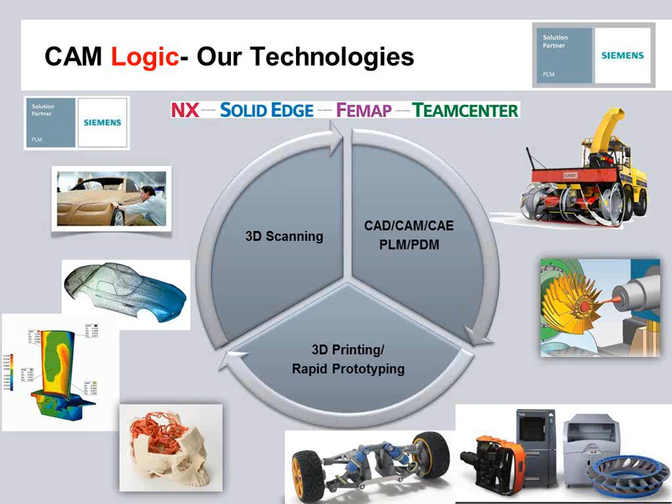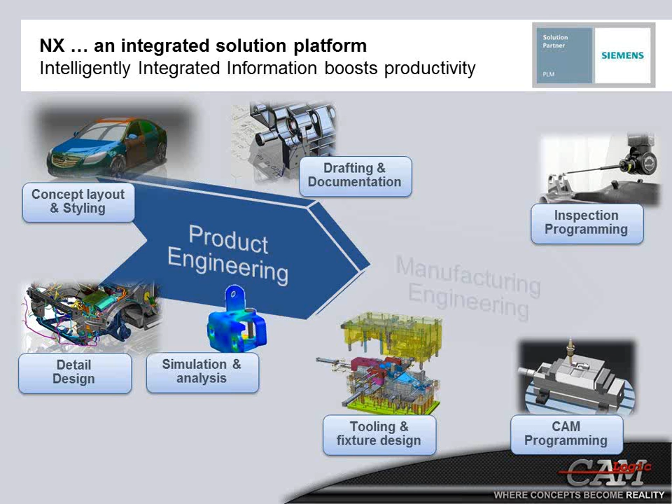Within the NX team, we've looked into challenges that you, our customer, have communicated with us that you are facing. And it's clear that these challenges have subtle differences, whether you are in the product engineering team or the manufacturing engineering team. What we'd like to do today in this presentation is split those challenges into segments. Let's look at the manufacturing engineering area after we first look at how those challenges have affected the product engineering area.

In today's presentation, I will be discussing NX 8.5 enhancements in three separate areas. We will first look at the CAD side, or product design. Second, we will look at CAE, or simulation. And then we will look at the enhancements in CAM, the manufacturing side.

So let's start out with product design. There are many enhancements in NX 8.5 CAD, and we will review each of these areas.

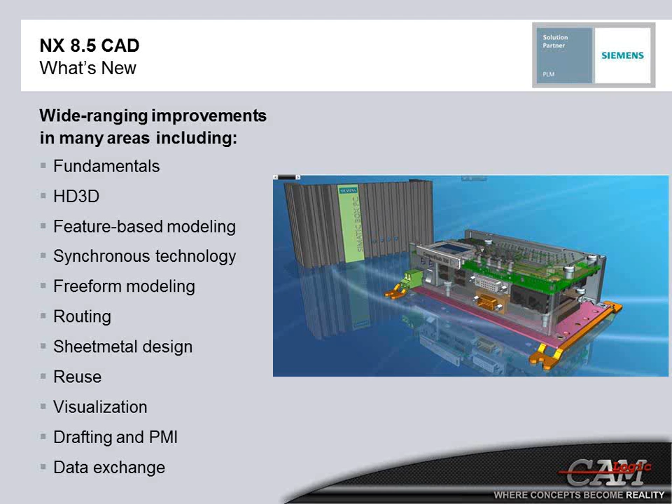Let's begin with the multiple enhancements in fundamentals and sketching. This list is a bit long, but stick with me. You now have the option of longer object names in NX 8.5, meaning you no longer have to abbreviate, and your models can be easier to understand and navigate. The new options for the display of smooth edges makes it easier to understand your model, especially when placing blends on complex parts.

It is now possible to customize the radial pop-up menus, which, by the way, this was the #1 enhancement request from the customer base. In NX 8.5, the user interface provides you with as many or few options as you need with the new Less and More dialog box versions, which are based on the role you are using. If you need fewer options, you get the simplicity of a Less dialog. And if you need the versatility and options of the full dialog, you get the More option.

Model rotation is easier to use and more intuitive thanks to enhancements such as setting the center of rotation to the center of the view or to an entity that you select. The new Align Facets Along Edges option improves the quality of rendering by generating facets along common edges selected by the user. See-through preview highlights the feature being created or modified by de-emphasizing other geometry in several customizable ways, such as making them more translucent, changing their color, or applying edge effects to them.

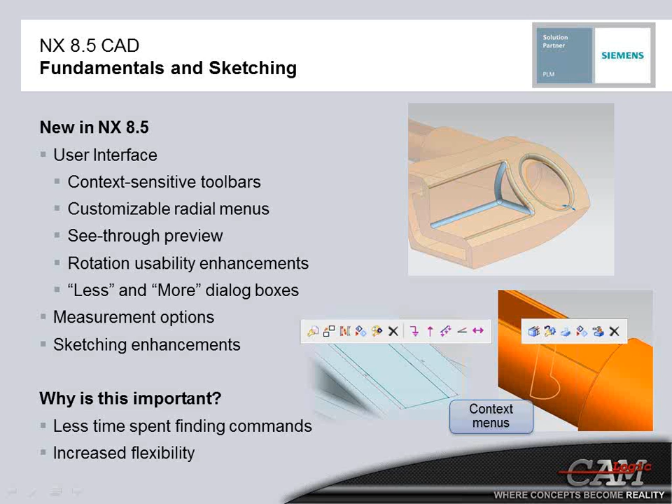The new Customer Default Create Dimensions for Typed Values enables you to create driving dimensions by entering specific values for the size of your geometry. And finally, for this slide, the new From Center option lets you infer constraints from the midpoints to the center of rectangles, giving you increased flexibility.

Improvements in feature-based modeling will allow you to automatically close the profile to surrounding model geometry. This tool is a smart volume based on closure with the target solid. The value is the ability to simplify the process of defining profiles, and it simplifies the process of creating ribs by automatically extending the profile.

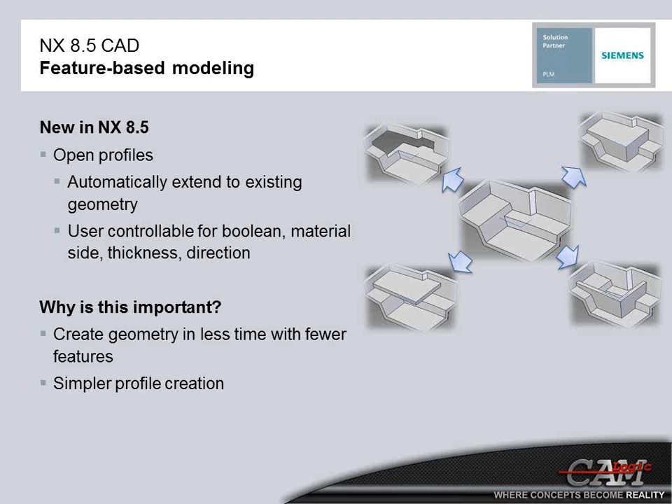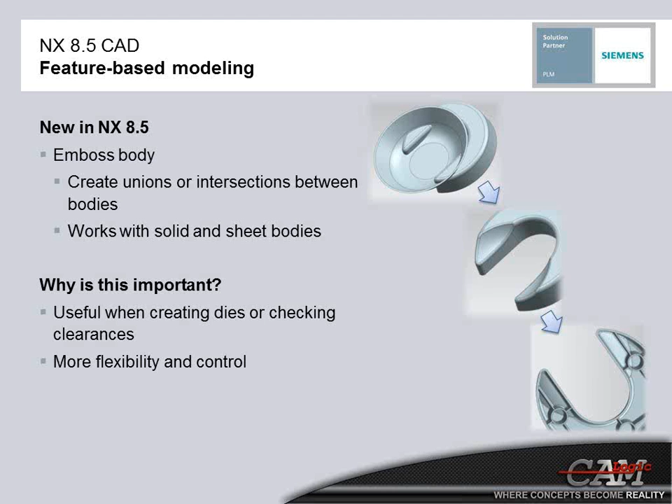Emboss Body is a new command that allows you to create intersections or unions between two solids or sheet bodies. This is useful for creating dies or ensuring sufficient clearance between two parts.

Users can now perform a Boolean unite while optionally removing excessive or unneeded portions of the model. Without this feature, the user would have to perform one or more additional modeling operations to get the same result. When you unite solid bodies with overlapping or excess material, you can select which faces should be kept or removed. This allows you to create your desired geometry with about a third less commands and 25% fewer features.

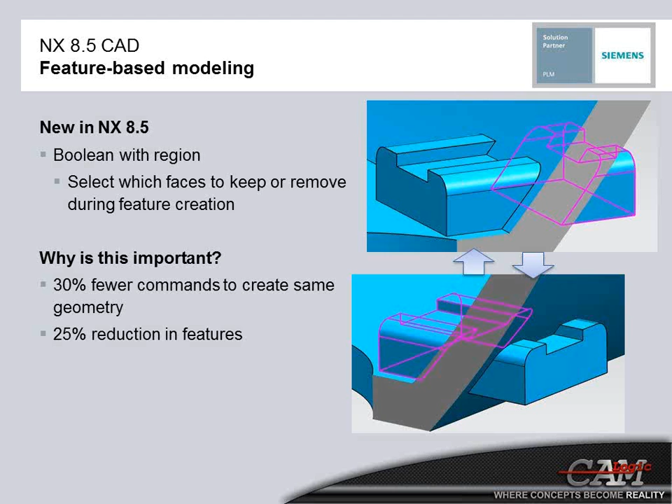You can now add draft to a model using an intersecting surface, including non-planar surfaces, as the parting line. This draft can be one or two-sided. While this has been possible in the past, with the new functionality, it is significantly faster and more efficient, with 40% fewer features and only a third as many commands as the old method.

Users can now add draft to a model where the parting line is defined by an intersecting surface. Prior to NX8.5, a user would have to create additional geometry before he could add draft to the model, which would have to be selected for each draft face created, which in turn, of course, increases as the model became more complex. And if both an upper and a lower draft feature was desired, it would require creating a second feature using the same workflow as the first one.

However, with NX8.5, the user can now reference the surface directly to define the parting line, irrespective of the number of faces, in a single pick. And he has the option of creating both the upper and lower draft faces as a single feature.

New selection rules make it easier to select the geometry you need when creating draft features and edge blends.

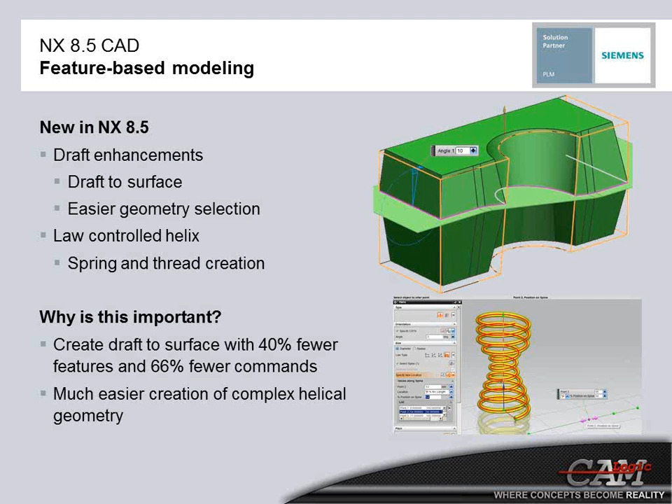Synchronous technology within NX8.5 can now alert you when the changes you are attempting will cause potential errors so that you can adapt accordingly. In synchronous modeling, there is now improved recognition of problem area conditions that are likely to result in potential errors when moving or deleting faces. The alert messages now provide improved clues to identify the error condition and offer potential solutions.

For example, the faces on the center boss feature are to be deleted using the delete face command. An alert message informs you that the remaining faces cannot adapt to close the area left by deleting the selected faces. Some possible solutions are given, such as using the cap option or deleting the blends first.

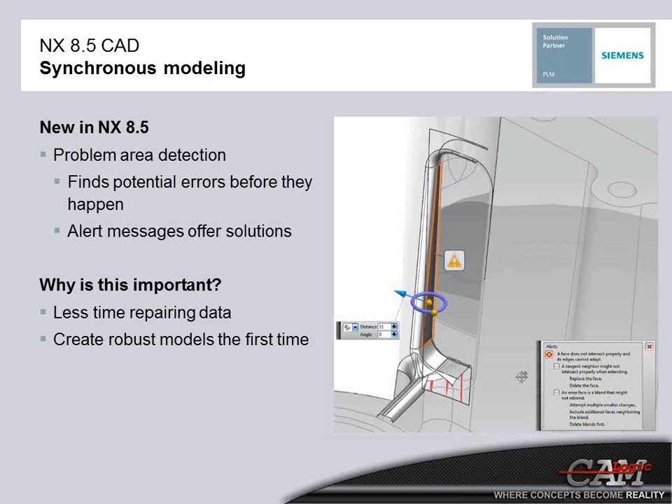New options in the delete face command allow you to easily select blend surfaces for deletion. You also have more options under the heal setting to get the geometry you want after deleting a face.

You can now use the delete face command to delete a portion of a blend and cap the end of the blend where it neighbors another blend. When you use the new delete partial blend option, all faces selected must be blends.

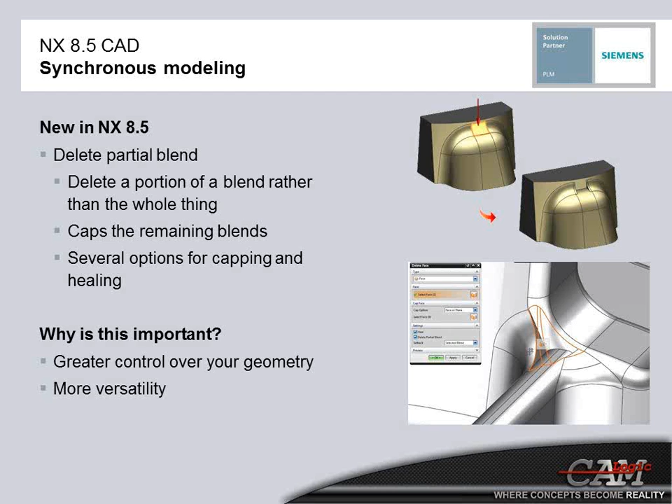Label Notch Blend is a new feature in synchronous modeling. This new feature allows you to label faces as blends, adding intelligence to history-free data and making it easier to get the results you want when you use synchronous technology to modify the geometry.

The new Step Face and Move Behavior option gives you greater control of your geometry as you use Move Face to modify it, meaning you are more likely to get the results you want the first time.

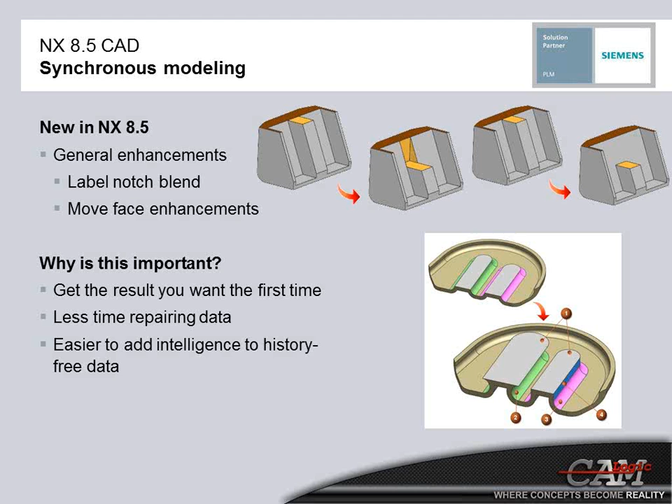Freeform modeling has been enhanced. You can enhance the visual display of your curve geometry by highlighting endpoints in several different ways. New surface analysis tools such as isoclines and reflection contours help you ensure that your surfaces meet all necessary requirements.

Fit Surface allows you to fit a surface to existing geometry such as facet bodies or points, which is useful for reverse engineering. These surfaces can be freeform, planar, spherical, cylindrical, or conical, and they are completely editable.

The local radius analysis command creates an associative analysis object that gives you information about points, edges, or faces and their location, UV parameters, and radius of curvature.

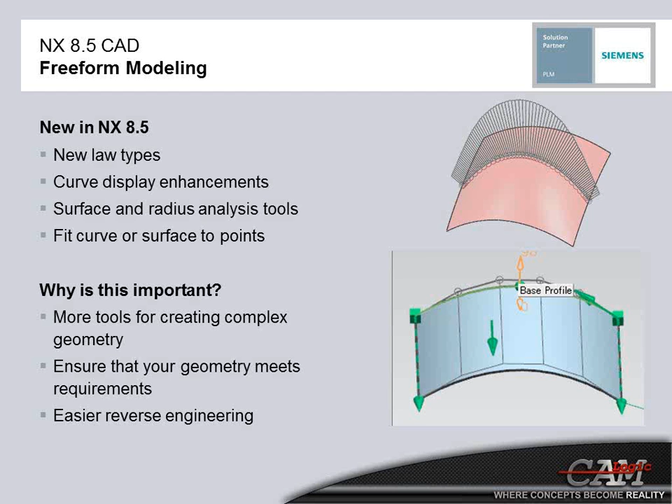For routing, the new Mirror Assemblies command in NX Routing allows you to mirror routing objects to create symmetric routing networks, thus saving time and ensuring consistency.

The Run Navigator command is now more powerful and versatile, thanks to the ability to create runs, search runs by attributes, assign paths, activate and deactivate runs, and control the flow direction.

The Unify Path command can now identify parts by their specifications, making it easier to find and replace components with the same specifications. This saves time and ensures that the requirements are met.

The new Handrail Creator command allows you to easily build handrails for platforms using a few simple parameters and the reuse library.

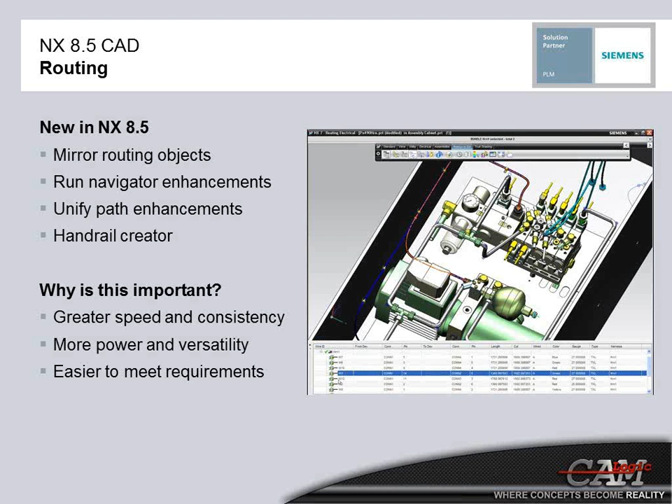Looking at sheet metal, it is now possible to create a flange on the linear edge of a deformed face formed by a dimple feature. You can then unbend or rebend the flange, or create flat solid or flat pattern features. It's one more tool to help you create the shapes you need in sheet metal.

NX's pattern feature functionality has been extended to NX sheet metal in 8.5. You can now pattern any punch type feature, edge preparation features like break corner and chamfer, and flanges, tabs, and normal cutout features. Patterning saves a great deal of time when creating multiple similar features.

Bead, dimple, and drawn cutout features are more versatile thanks to the ability to create them across cylindrical blends in the unbent state. The new feature remains in place after the part is rebent, and it adapts to the bent state. It is now possible to create a bend feature across existing bead, dimple, or drawn cutout features. The existing geometry will correctly adapt to the new bend.

The Bend Taper command now has more options to help you create the geometry you need, including linear, tangent, and square bend regions. You can use the new Convert to Sheet Metal wizard to convert a solid model into an NX sheet metal part.

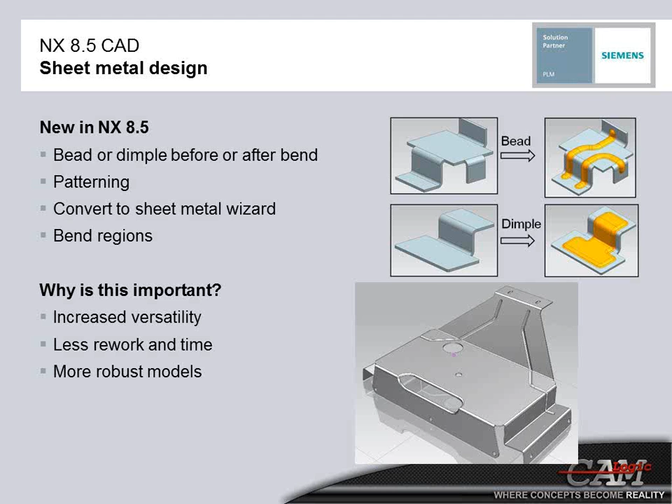While reviewing enhancements within reuse, you will notice that you now have the option of changing deformable parameters on a part when you drag it from the reuse library. This makes placing your deformable parts quicker and easier.

When you add a component from the reuse library to an assembly, you have the option of viewing the component in a preview window, where you can pan, zoom, and rotate it to verify that it meets your needs before you place it. NX 8.5 gives you the option to add multiple occurrences of a reuse library component at the same time.

This is especially useful for standard parts that are used in many places at once. For example, fasteners.

Managing reusable components in Teamcenter is easier and more powerful with new capabilities like the ability to place components based on predefined parameters and save individual components as family members.

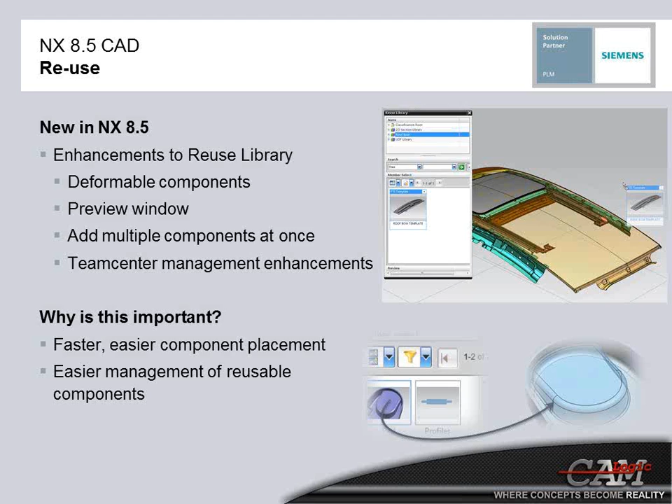The new 3D dome scene background in the True Studio environment maps a panoramic image into a hemispherical dome. This means that as you pan around your model, it appears to be in a realistic environment from any angle, improving the quality of your visualization.

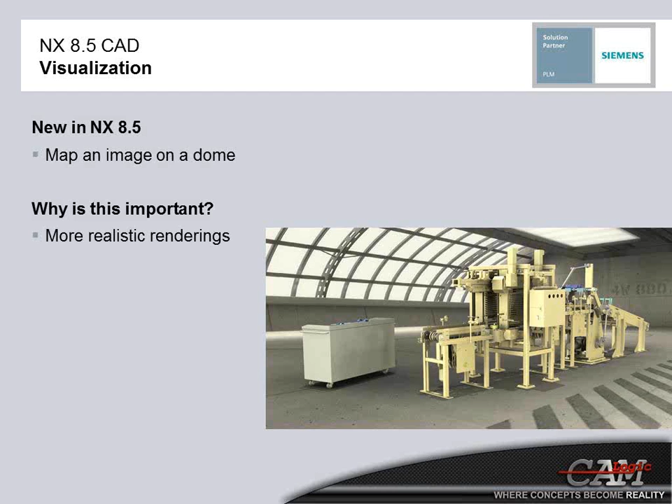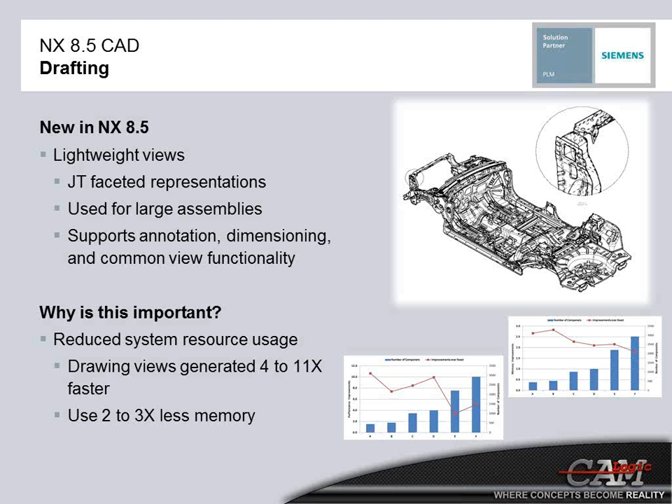As we look at the updates in NX 8.5 drafting, you now have the option of creating lightweight drawing views. These views, which consist of JT-faceted representations of model geometry, can be used for all drawing views and will reduce system resource usage, especially with drawings of large assemblies.

The drafting user interface has been simplified with NX 8.5. Many commands that are not needed in the drafting environment are now suppressed to clean up the interface and make it easier to find the commands you do need.

The View Creation Wizard has been enhanced with new commands and options designed to optimize performance with large assembly drawings, such as the option to use lightweight views and showing a different set of view creation options if the assembly exceeds a user-defined number of components.

A new option gives you the ability to permanently align a view with other views when you are placing or editing it. This alignment will be enforced even if the view changes or moves, giving you greater control over your drafting views. It is now possible to create a breakout section view from a view that contains view breaks, giving you more versatility to create the views you actually need.

You now have the option of having your associative custom symbols update automatically when the master you created for them changes. This helps to ensure that your symbols remain up to date.

You can also use the new Replace Custom Symbol command in NX Drafting and NX PMI to take greater control of your custom symbols by changing or repairing associative links, linking a custom symbol to a different master symbol, and creating links between legacy and existing custom symbols.

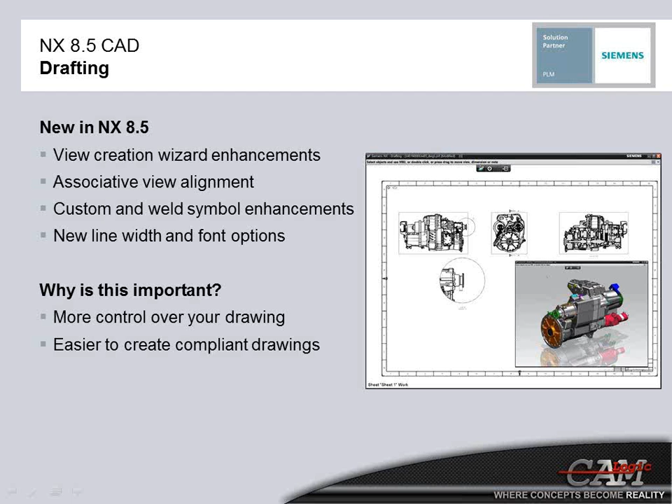For PMI, the user interface has been simplified, and some commands have been renamed and moved to make them more intuitive to use. You can now use PMI assembly filters to exercise greater control over which PMI is displayed in which places, helping to clean up and manage your PMI.

It is now possible to use the Circle U tolerance modifier symbol when either ASME or ISO standards have been selected.

When trying to find the PMI associated with selected geometry, you now have the choice of viewing it in a permanent or temporary view. The display of arrowheads on leaders in PMI has been enhanced in NX 8.5. Arrowheads will now maintain a proper orientation and appearance when the model is rotated, thus making it easier to understand exactly what they're pointing at.

When applying cross-hatching to a PMI region, you now have the same selection of patterns available in NX Drafting, providing for better flexibility and clarity. When extracting geometry from a body, you now have the option of extracting PMI data along with it, reducing rework and helping create smarter models.

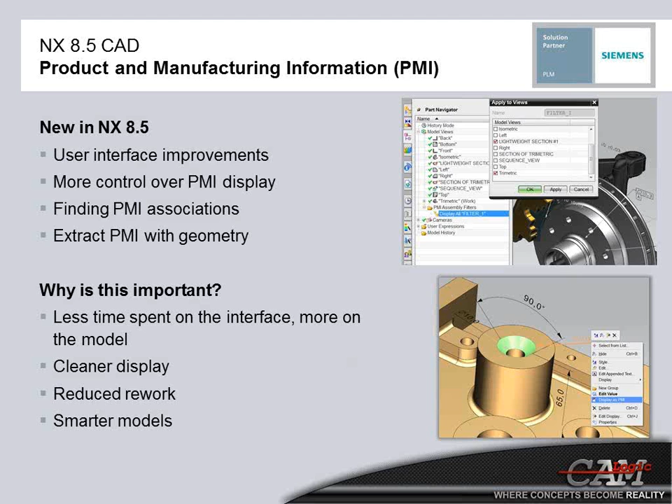In NX DraftingPlus, you can now create drawing booklets, which are multiple drawing files combined into a structure. Each file can contain multiple sheets. This allows you to group together the drawings needed to define an assembly or study. Since the files in the booklet are managed as a single unit, it is easier to manage them and the impact on system resources is reduced.

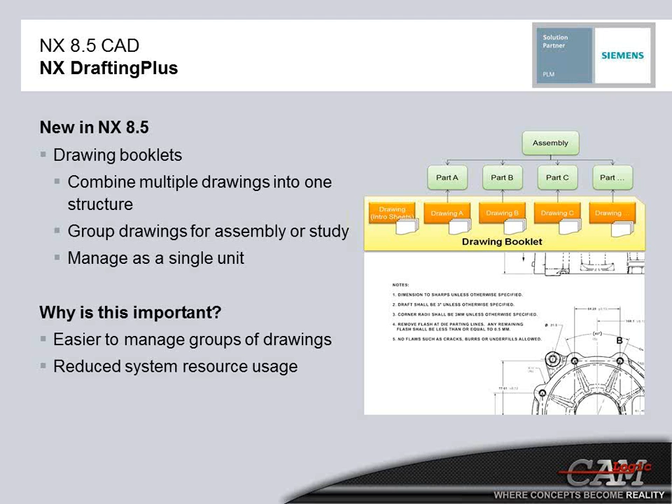It is now possible to easily move drawing objects from one view to another while maintaining their associativity and proper scale, orientation, and style. You can now smash a drawing view, unassociating the objects in that view with the view itself. This gives you more flexibility in placing your objects in a 2D design environment.

Migrating IDEAS data into NX is now easier and faster thanks to the ability to import IDEAS curves into sheet or view sketches in the NX drawings. With the new Smash to Sketch option, you can smash a custom symbol into 2D geometry that can be manipulated or used however you need it to be.

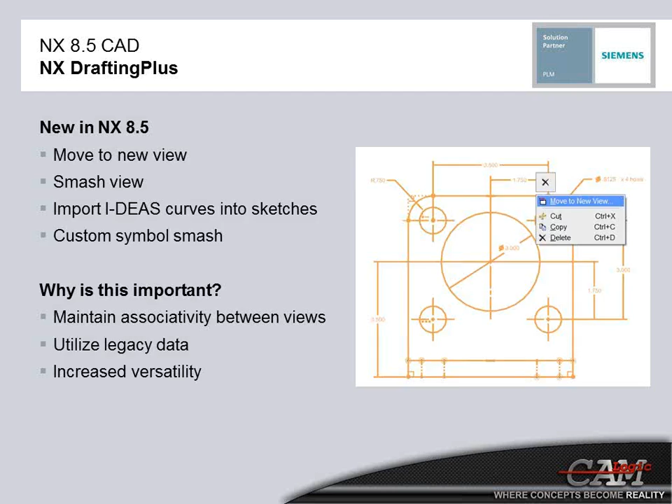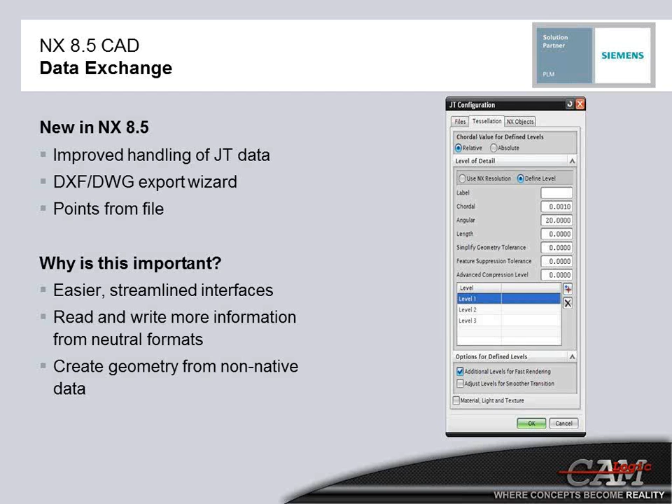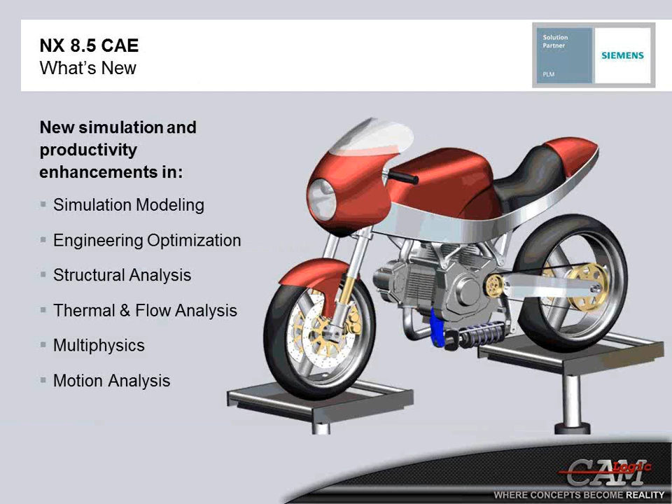While using NX 8.5 for simulation modeling, you will be able to view your finite element model in context, which speeds up the modeling process, allows for faster FE model updates, and allows you to make the right modeling decisions in the right context of the problem to be solved.

Enhancements to mid-surface productivity will provide better results on the first pass. And element quality checks are solver-specific, which will highlight element quality issues before running the solver.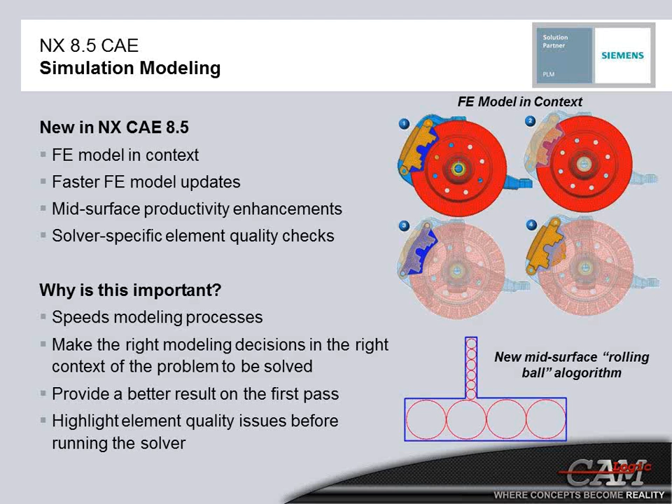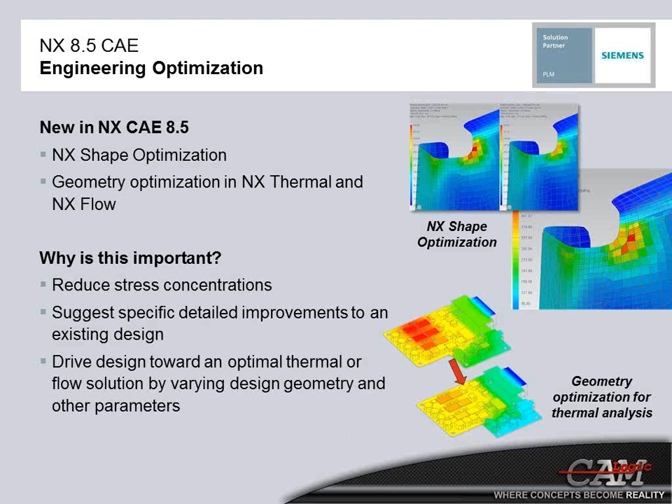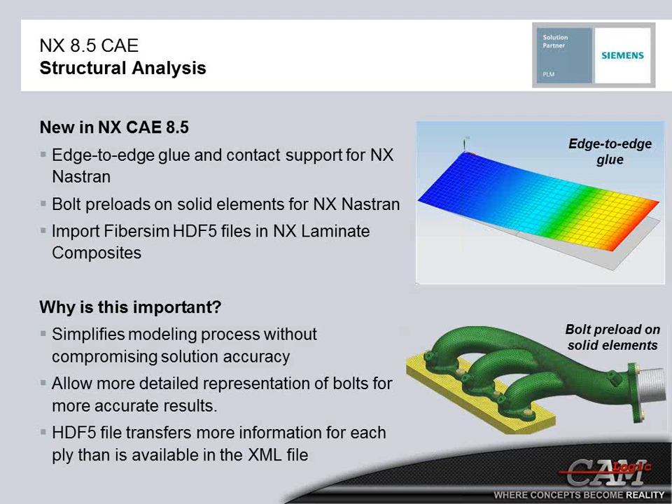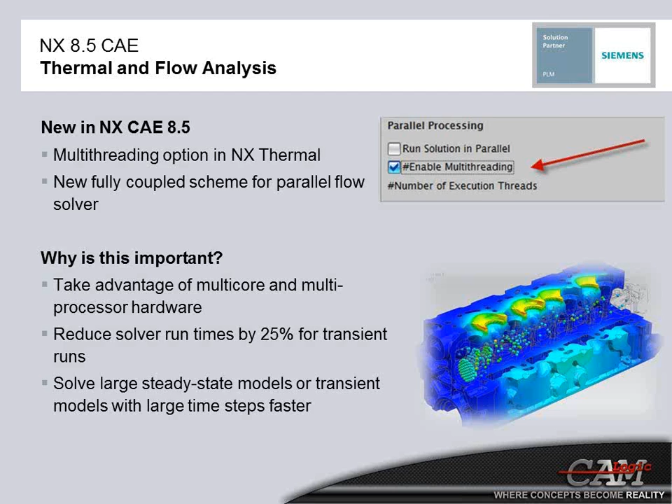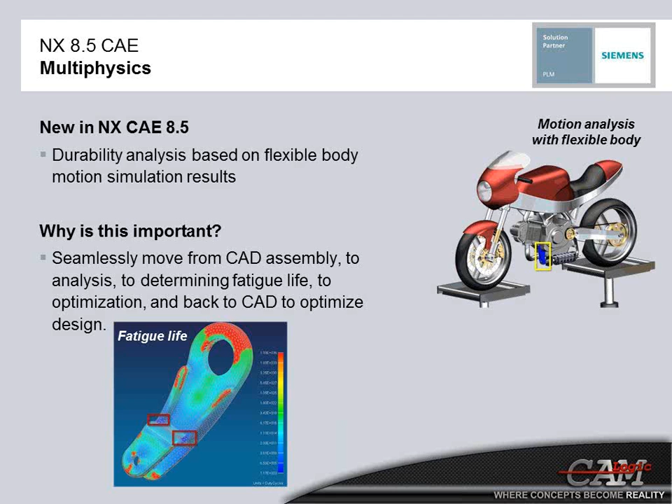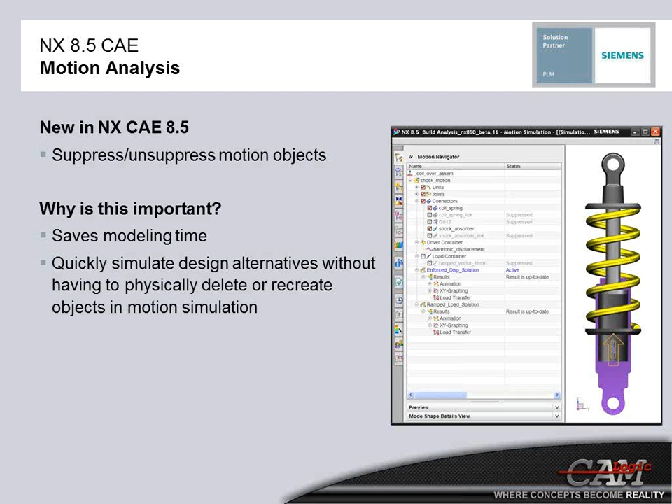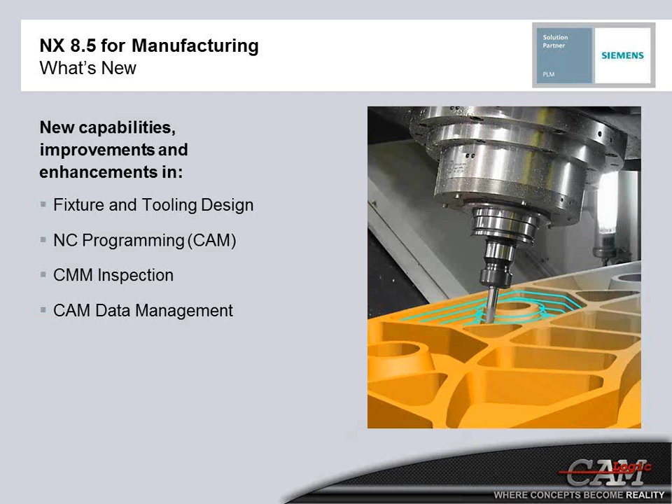New in mold design is the addition of Moldex3D. I'll tell you a bit about the product.

CoreTech System Co., Ltd. is the provider of world-leading CAE products for the plastics injection molding industry, and the flagship product is called Moldex3D. Moldex3D consists of 3 modules: eXplorer, eDesign, and eSolid.

The Explorer product is developed to support the product designer's needs. eDesign is developed to support the mold designer's needs, and eSolid is developed for CAE specialists to perform high-end plastic analysis. The integrated product name is NX EasyFill Analysis, which uses the eXplorer technology from Moldex3D.

NX EasyFill Analysis is a true integrated mold flow simulation tool for NX designers to analyze part design and mold designs during the early stage of the design process. It provides a user-friendly interface and access to Moldex3D's leading true 3D flow simulation results right within the NX environment. NX users can easily set up analysis with only a few clicks, requiring no additional training, CAD conversion, or meshing jobs.

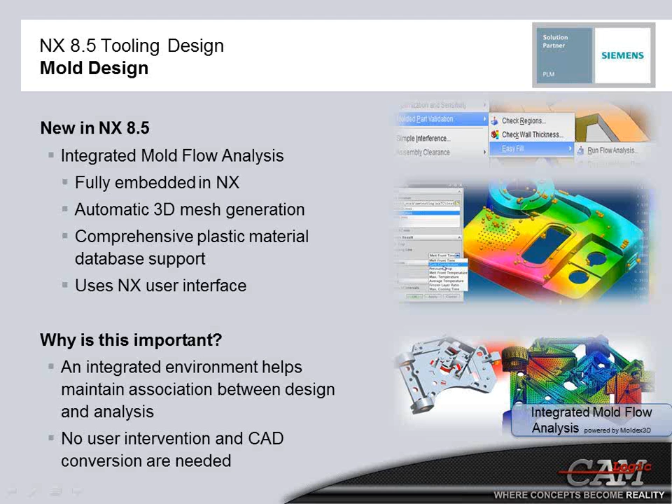With the goal of enhancing the mold design process, NX 8.5 improves the overall mold design process through elimination of many manual modeling methods. Upfront part design validation for manufacturability and moldability in an integrated NX environment speeds up the decision-making process, done through the addition of parting surface automation.

This includes automatic creation of parting surfaces possible under most conditions, improved intelligence in deciding a preferred surface type for a parting segment and creating parting surfaces, and improved capability in breaking up the parting loop automatically into parting segments suitable for creating parting surfaces.

There's support of preview for the extrude and swept surface types. The default size of the bounded plane and enlarged surface types are large enough for creating parting surfaces, and intelligence for deciding the keep side when trimming parting sheets are some of the improvements to note.

Cooling channel design usability has also been enhanced. There's reuse of standard parts, and the ability to edit electrode components through MB3 in the Assembly Navigator. There's the ability to translate and rotate the blank design during the design of the blank, and provided CSYS handle control to define the orientation of the blank.

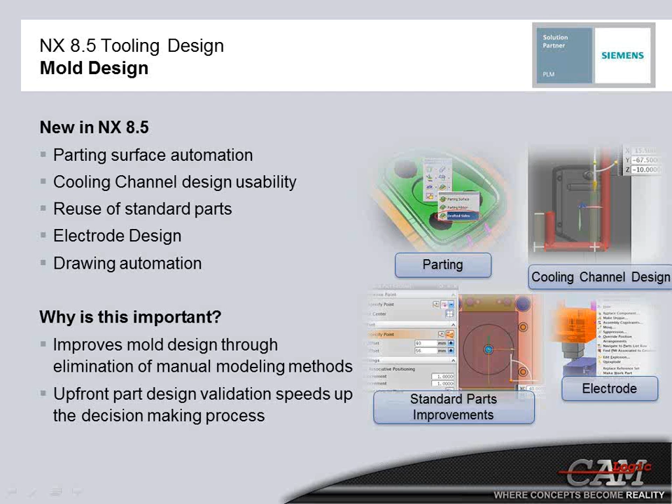For progressive die design in NX 8.5, intermediate stage design usability has been enhanced by providing a preview during intermediate stage creation. There is an option to link to sheet body or not in the customer default, and implemented default naming rules have been added in customer defaults.

For direct unfolding, we support 0 mm inside bend radius during the direct unfolding process, and that has been enhanced. Support of gussets or ribs in bending areas during unfolding has been enhanced, as well as efficient unfolding support for data imported through IGES or STEP translations. There's also support for non-uniform thickness parts for unfolding.

The EDW process design support enhancements include a new set of die face design capabilities to support the engineering die design process, such as patch openings, addendum, binder creation, and draw bead, similar to the process implemented in larger stamping die design processes.

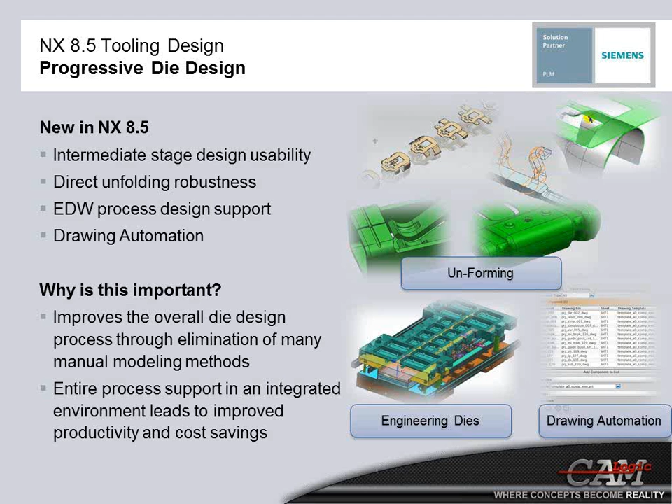Drawing automation improvements include an improved template-based approach for drawing creation, automated dimension and annotation creation all based on templates, automatic recognition of manufacturing information such as hole type, amount, diameter, etc. from the 3D models, automatic dimensioning for circular type holes, and support for multiple parts in one sheet drawing.

Automotive stamping die design has been enhanced with trim angle check and draw die punch improvements, and new capabilities have been introduced to perform blank nesting of the developed curve. This provides feedback on the utilization of the strip, desired strip width, etc. There are many ways to do blank nesting layouts, such as rectangle, one-up, parallelogram, or other options.

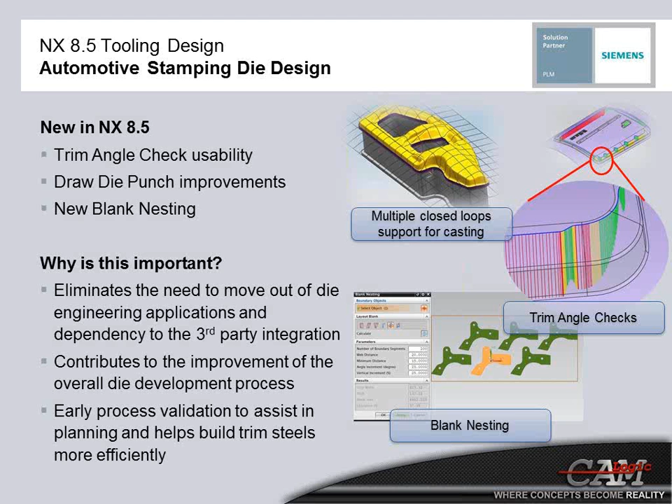NX for industrial machinery and heavy equipment parts enhancements include volume-based 2.5D milling, providing a fast and intuitive method of programming prismatic parts. You simply select faces such as walls and floors within the 3D part model to define the machined volumes. An instant visual preview gives fast and easy validation of the planned machining operation.

Programming can be as much as 5 to 10 times faster. The system continuously keeps track of uncut material and minimizes air cutting, reducing machine time up to 10%.

Multi-stage machining processes also track the in-process workpiece for greater efficiency. Updated blank models are automatically maintained for each station. Advances in feature-based machining automate the sorting of machining operations across multiple setups for faster, easier programming.

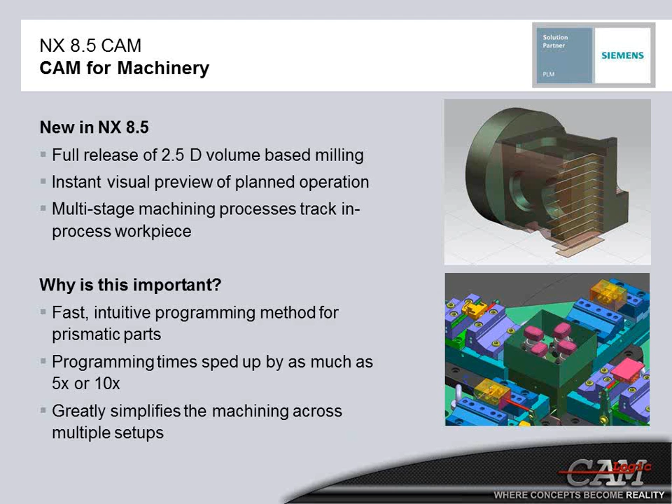NX 8.5 has new options for roughing operations to improve machining efficiency for turbines and multi-bladed parts. By adding depths to slotting motions, you can assign higher feed rates or deeper depths to roughing operations. Additional options for finishing blades facilitate the rough finish iterations to finish thin blades more accurately and with better surface finish.

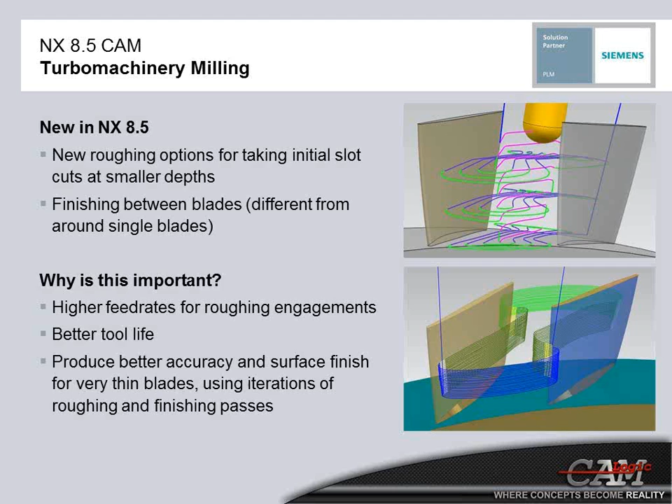Valley rest milling is enhanced in NX-CAM 8.5 with new hybrid Z-level and projected patterns that identify, sort, and prioritize the valleys to find the best cutting motions. By combining steep and non-steep cutting approaches into a single pattern, you can easily clean out valleys with various orientations and achieve a smooth finish.

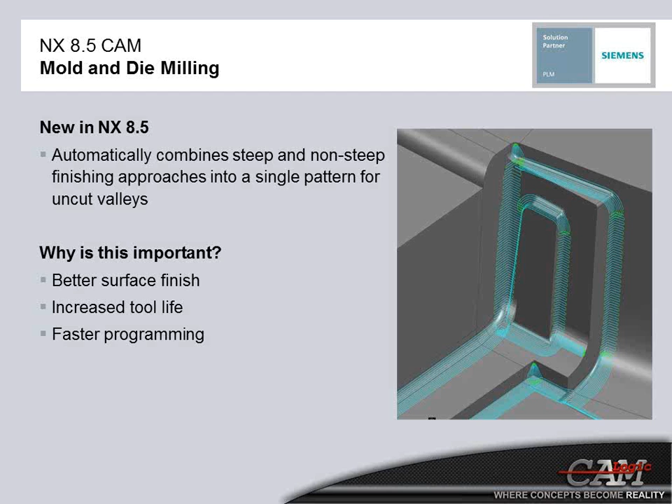CMM inspection programmers can work directly within the same NX 3D environment as designers. While in this environment, programmers can use the product and manufacturing information, or PMI, and geometric dimensioning and tolerancing, or GD&T, applied to the surfaces of the solid model, and generate programs very quickly from those.

NX-CMM 8.5 also provides time-saving features, such as new collision avoidance methods that find key interferences and automatically resolve them for you. You can preview 5-axis scans with probe orientations to make sure the desired results are achieved. And more complex scans can span multiple features.

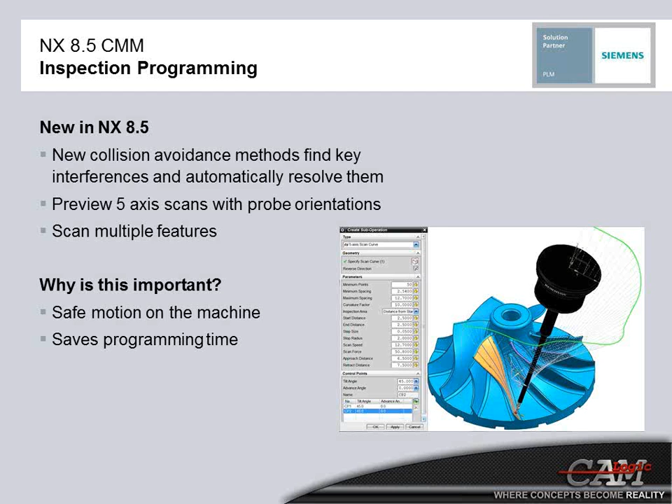With NX-CMM 8.5, you can quickly see and evaluate your as-built measurements in a graphical environment, right next to the as-designed models that drive your CMM inspection programs. Putting the measurement results into context helps you find the most effective approaches to achieve quality improvements.

Measurements are displayed in the Operation Navigator as a list and linked to the graphical display for each measurement. Best fit analysis and verification help you find the possible causes of tolerance failure and assist in decision-making that will improve component quality.

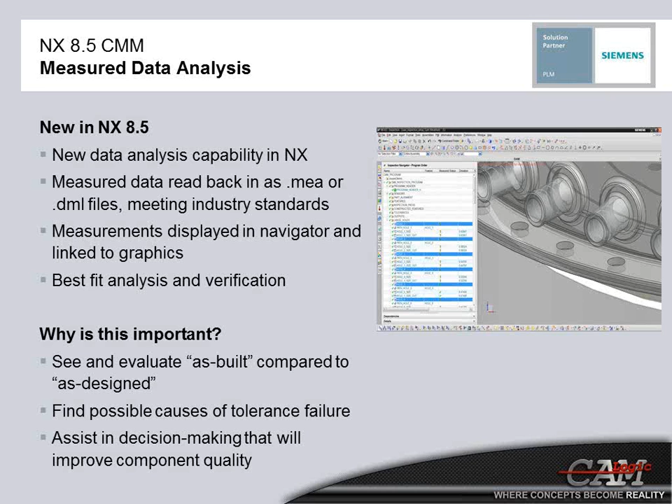As an integral part of a CAM data management strategy, the new Manufacturing Resource Library is used to manage tooling vendor catalogs and preferred tool assemblies, as well as your custom resources. The MRL stores and classifies its content in Teamcenter, Siemens PLM software's comprehensive system for managing product lifecycle management data and processes, with a full range of search functions and graphical displays so you can easily find and access your tools.

From NX-CAM 8.5, you can search the cutting tool library, find the tools you need, and pull accurate 3D models of the selected tools directly into your CAM programming session.

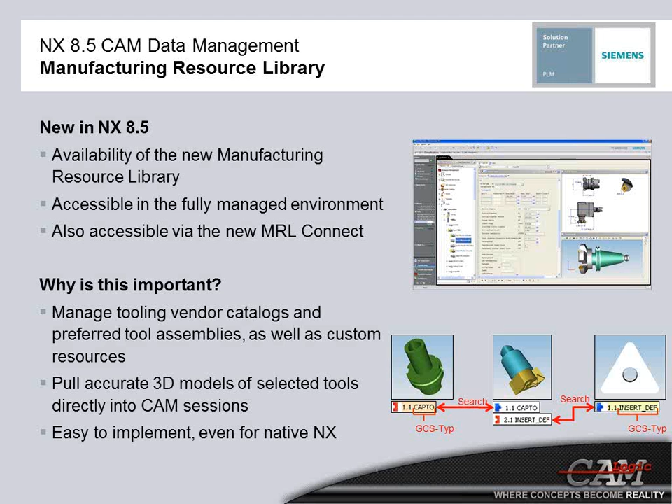Shop Floor Connect for Teamcenter delivers CNC program files directly to machine controllers. More than just a traditional DNC system, the connection to the centralized Teamcenter database ensures that manufacturing data is secure and the manufacturing plan-to-production process is controlled. It avoids data duplication and manages revisions to make sure the correct manufacturing data is used on the shop floor.

With Shop Floor Connect, machine operators can directly access production-released data. Using job numbers or work package identifiers, operators can locate the correct data files needed for production, including CNC programs, tool lists, setup sheets, and drawings. When CNC programs are created, modified, or optimized by the production team, they can be saved and maintained as new data or as revisions to the existing data.

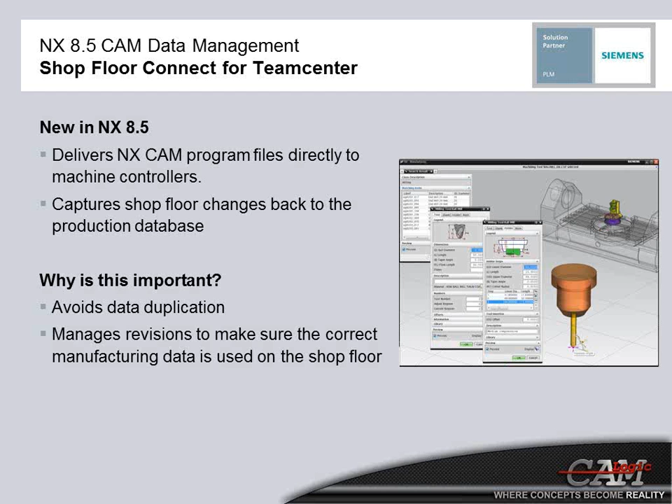This concludes the many updates and enhancements included in NX 8.5. I trust that you have learned more about what to expect in 8.5 and how to make smarter decisions for better products.